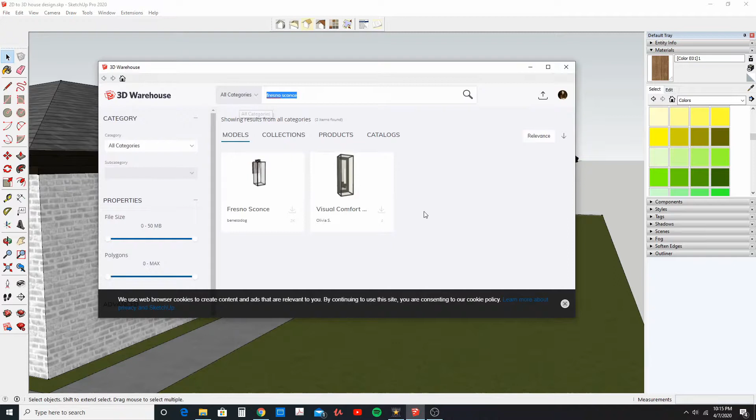Now let's add a light fixture right here. To do that, let's go to 3D Warehouse and type in Fresno sconce. You'll see these come up, and let's select this first one here and download it directly into our model.

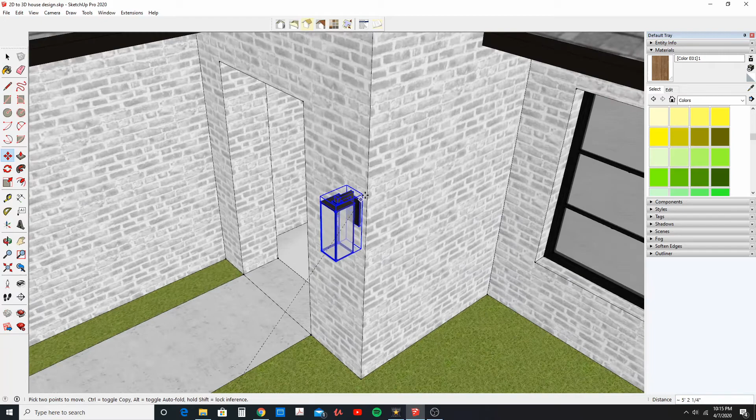Okay, now let's rotate it to where we want. Type 90 degrees, then click and drag and place this on our right side here. It doesn't really matter where, we just want to keep it a little bit above eye level, so you can visually place it in the center of that wall. I'm actually going to increase the size of it, so let's go to scale and select one of the corners, it could be any one of them.

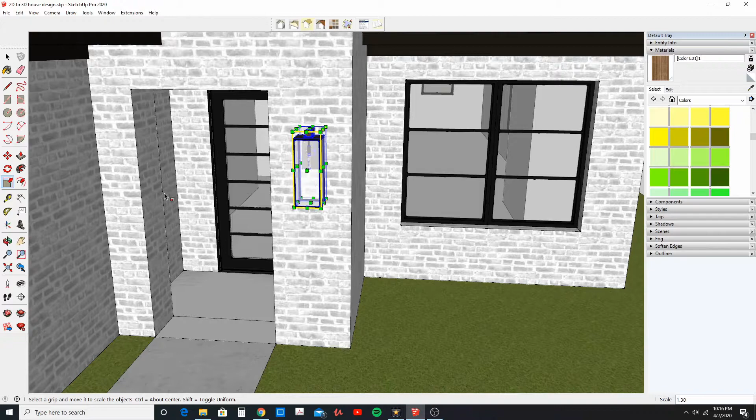We'll drag it to make it larger, just a little bit, and let's center it again. One trick to center it is to select the midpoint of the group, lock into our red axis, and snap to the center here. There we are on that center point. I'm going to raise it a little bit higher, and there we go.

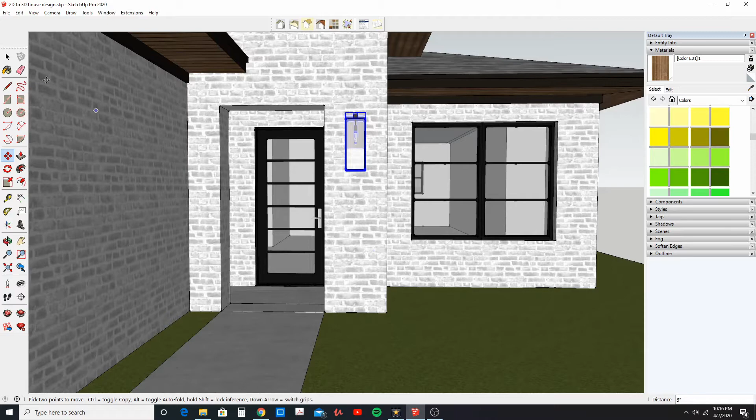Okay, so we have our light fixture there, and let's add some here to our garage as well. Let's select the midpoint, hit Control to make a copy, and place it right there to the center, and right there. Okay, very nice.

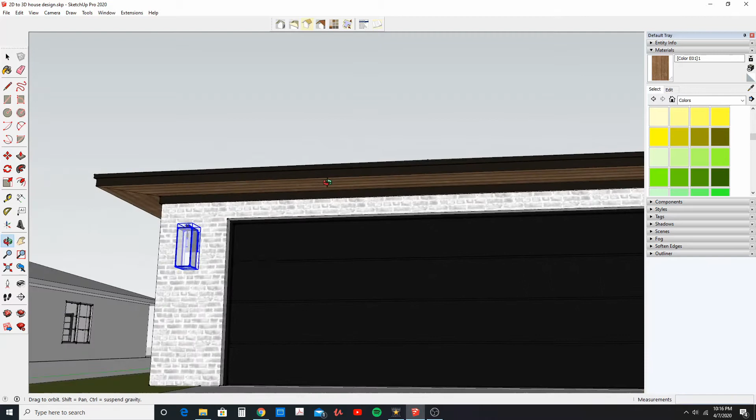Alright, so let's keep adding a little bit more detail. Let's add some soffit lighting to our 2-foot soffits here. To do that, I'm going to use the rectangle tool and draw anywhere on here, typing in 4,4 to draw a 4x4 square.

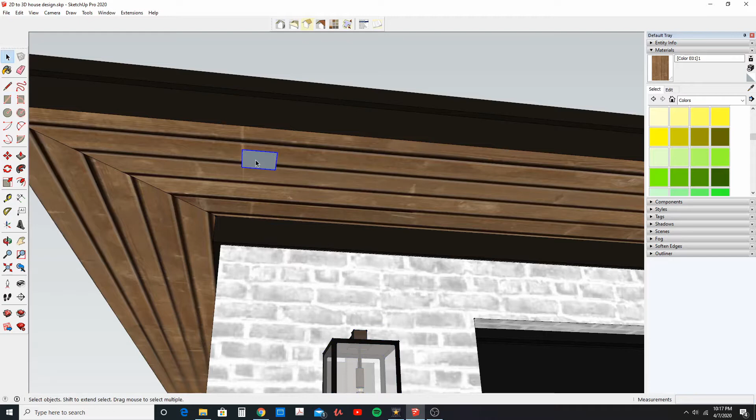Let's use the select tool and make this into a group. Right click, make group, double click, and let's offset just about a quarter of an inch, then use the push-pull to push down a quarter of an inch and a quarter of an inch. So there we just have a little bump out.

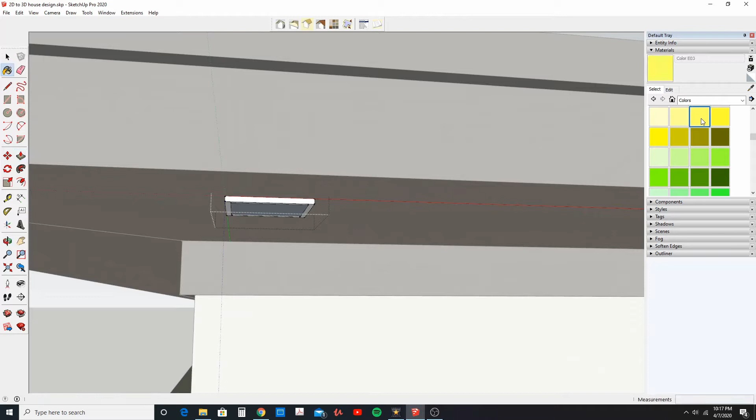Now let's add a yellow color for our light, and escape out of that. Let's add some more color using this sample paint. We'll collect that color there and apply it to our light. Okay, now we want to apply this around our model, and I want to get it more or less in the center of this soffit.

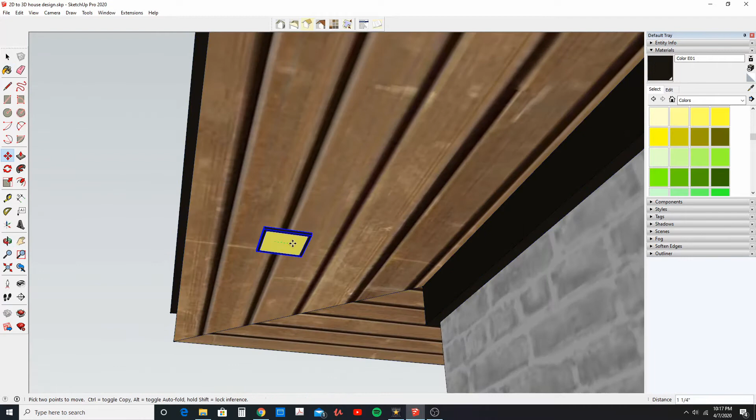We're just going to drag and place that in the middle there, then make a copy all the way at the other end. We can lock in that red axis if we like and click once. Then, while still in this command, let's hit divide by 2, and it'll place one right in the middle.

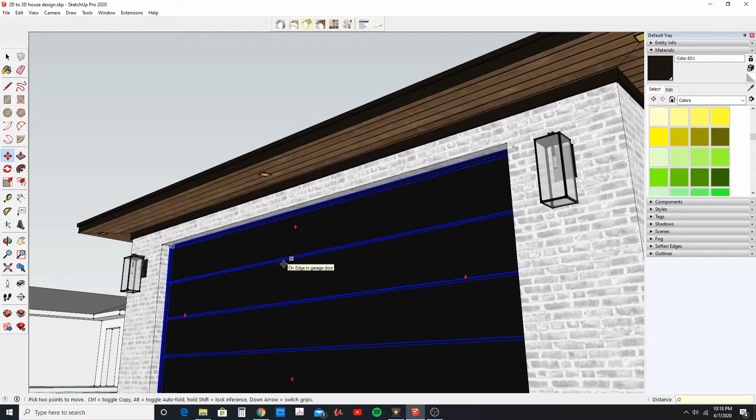And there we have some sconce lights there—I'm sorry, our soffit lighting. We'll go ahead and add one just in the middle here, and then let's keep going and adding some more.

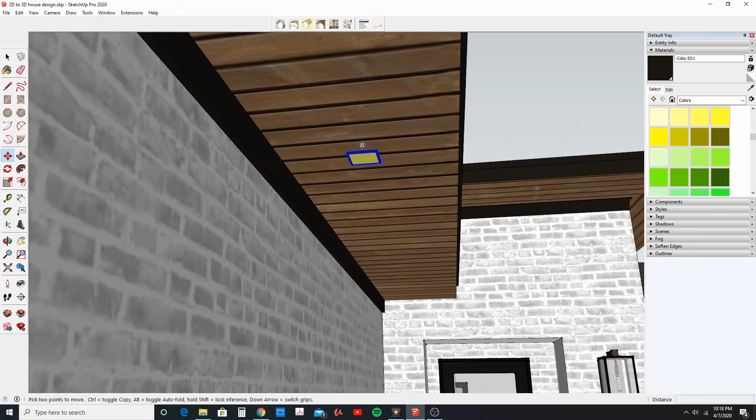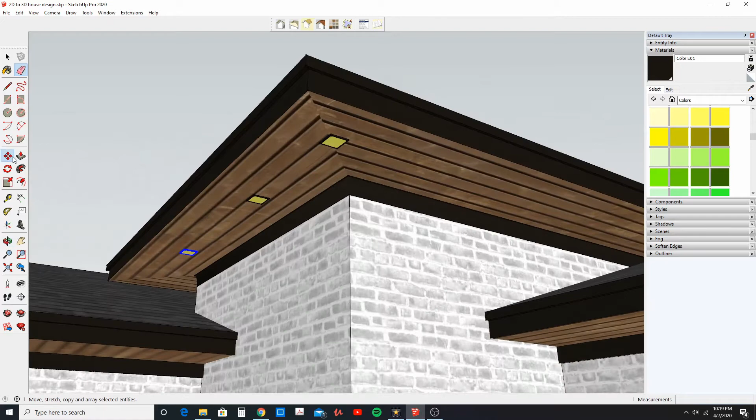I'm just going to select it, use the move tool, and grab anywhere on the surface of this group, hit Control to make a copy, and drag to the corner here. Actually, I don't want this to be in the corner on this one, so I'm going to go about to that point and drag about there, and let's move this to about there.

These things will just make it look that much better when we go to do our rendering for this home. Here I'm going to put this one kind of in the center of where that window is, and then let's add some more around the edge and side of the house.

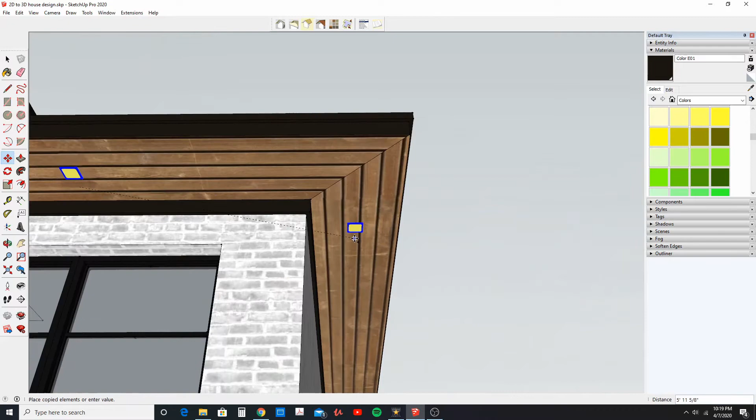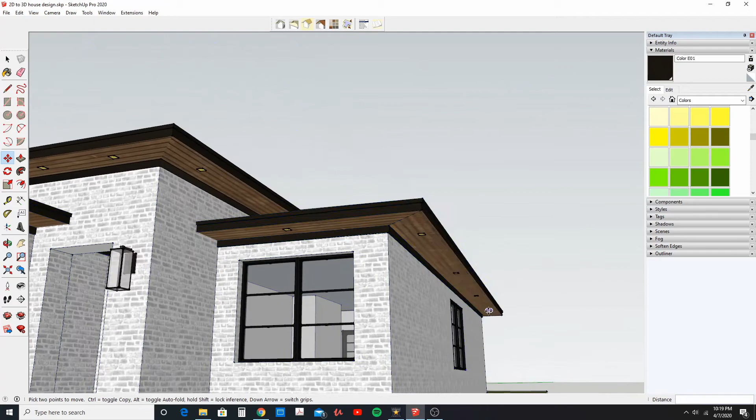I'm going to click, hit Control, and drag it all the way to the end. We're not going to go to the edge, we'll go to about here. And I'm going to hit divide by 3, and there it added some more in between there. So now we have some lights going all around our house.

It's looking good. I'm going to drop these sconces just a little bit more, I think they're just a little bit high. I'm just going to come down about 4 inches.

So I have them all selected. To select them all you just have to hold down Control or Shift, I believe it does the same. You can deselect with Shift. Use the move tool, just click anywhere, and I'm going to move it on that blue axis down 4 inches, enter, and we'll leave it like that.

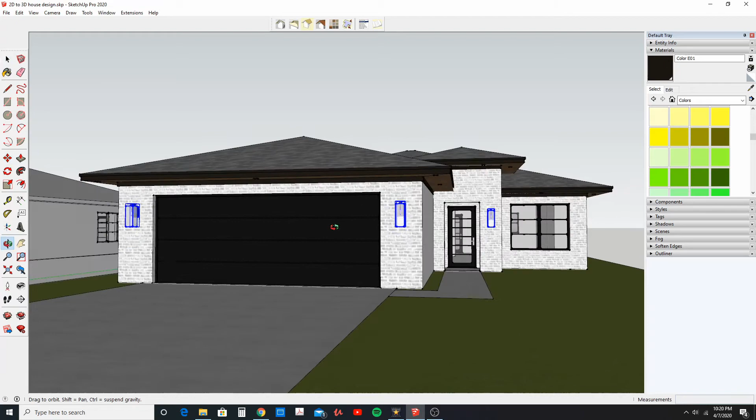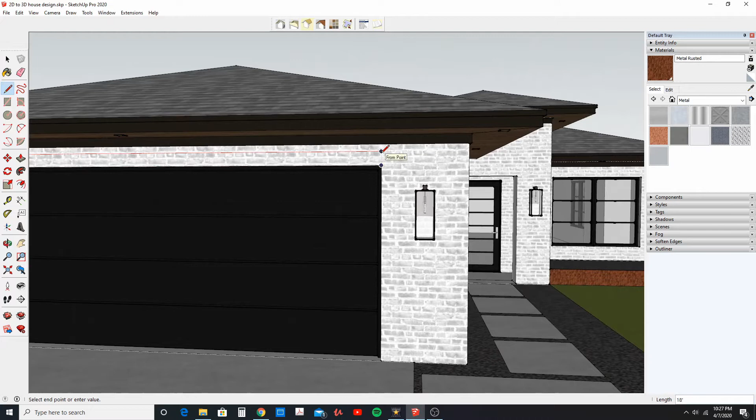Okay, so now let's add some headers above our windows and doors. To do that, I'm just going to use the line tool and draw a line. For a home like this we don't want to make them too large, but for this I'm going to go 6 inches, and let's make this into a group by double clicking, right click, make group, and double click to activate it.

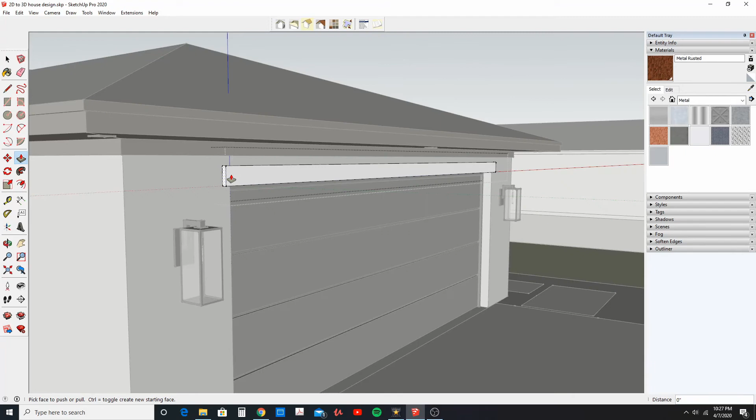Let's come out 1.5 inches, and then we're going to come out on the sides, let's say 3 inches on each side. And then let's apply a material to it.

So for this I'm going to do another concrete look to it. Let's go to concrete, and we'll go to our polished concrete again, and I think that's actually a nice color for it. Now let's copy this to some of the other areas where we're going to add it.

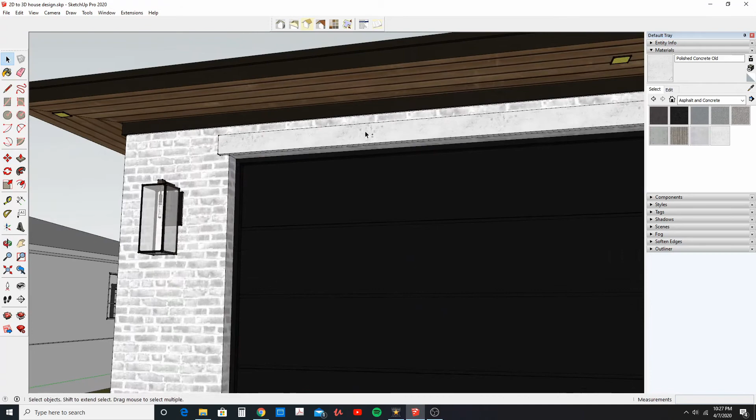Let's go over here to the edge, and let's put one right above our door, and let's drag it. I'm going to double click, grab this whole edge, and we're going to use the move tool, grab that line and just move it along that red axis till we hit this point here.

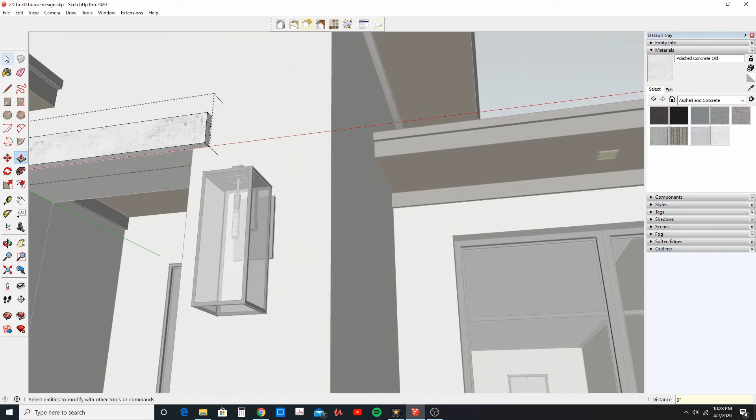And then let's come out again 3 inches. Okay, now let's grab it again, and actually I'm going to make this the same material underneath it.

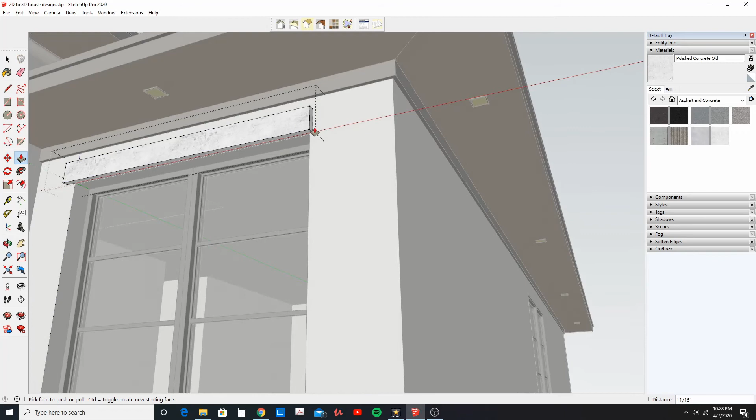Use the move tool, grab it at the end, Control to make a copy. Let's come to the end there, push pull, and let's come out 3 inches. Now I don't want this one to be as wide, so I'm going to push pull it down 2 inches, so that's just a 4-inch header.

And let's do the same thing for the sill. I believe these windows were 5 feet, so I'm going to copy it down, hit Control to make a copy, 5 feet 4 inches, and there it placed it right where it needs to be.

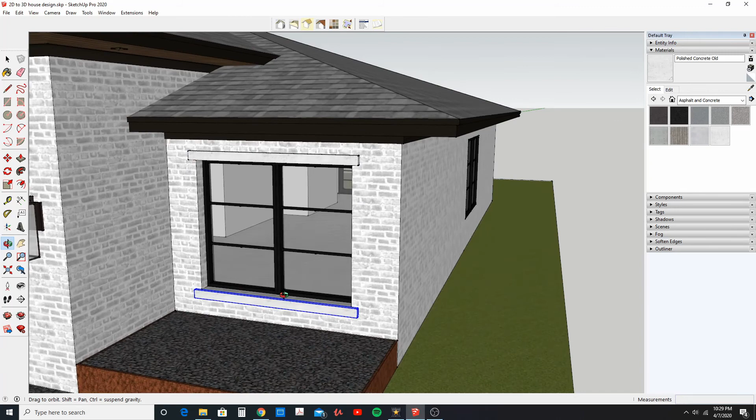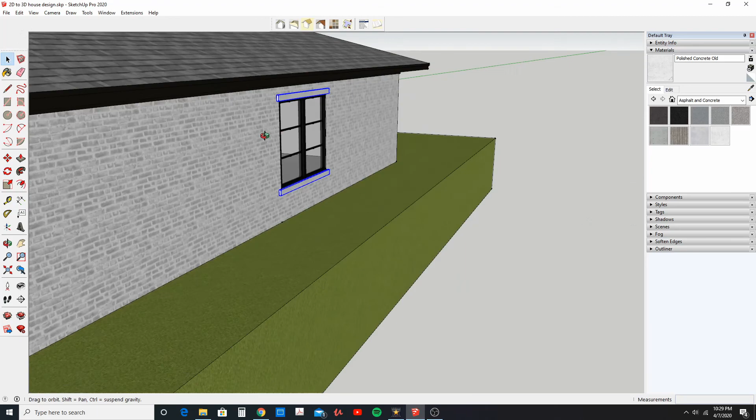I'm going to go ahead and select it, use this to make a copy, hit Control, and let's move to the edge here, and use the rotate tool and get on that blue axis. Let's pick a point here, go 90 degrees, and there we added our header and sill to those windows.

Just gives it a little bit more detail, makes it a little bit more interesting to look at.

Okay, so now let's add some gutters and downspouts to this house.